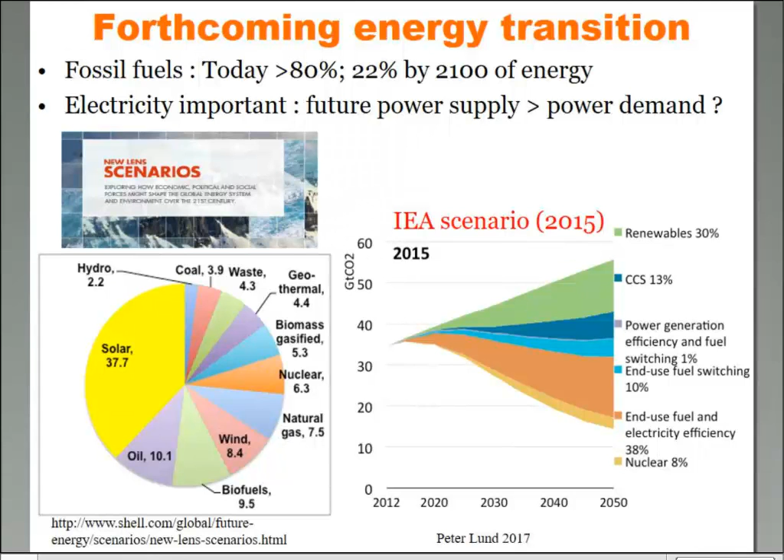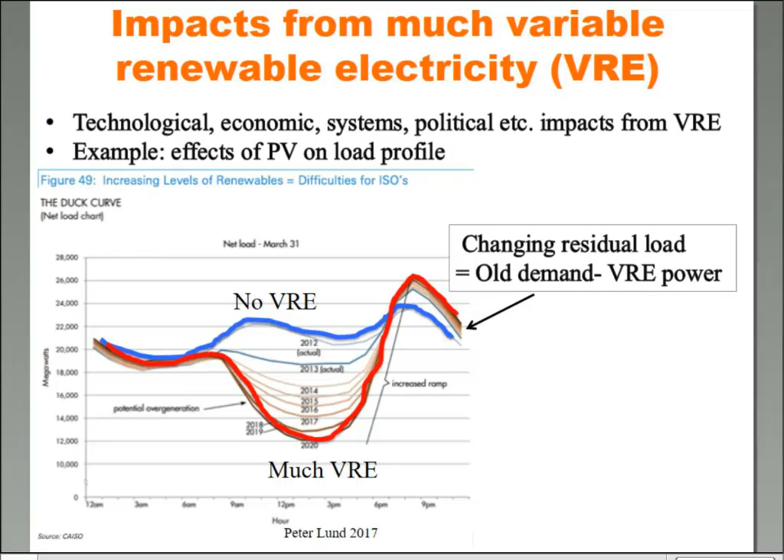So there are some political implications. You may know that in Europe we speak about capacity markets, that there should be some subsidies for traditional power to run in order to match the new profile that we see here. That's why the question of flexibility is very important, in the sense that it really extends from technologies to economics, to policy making, and so understanding what we can do with flexibility has very many-sided implications.

But let's briefly look at the relation of energy efficiency and renewables. In the big macro scenarios that we saw, the Shell scenario or the IEA, they seem to be separate entities, but as we move closer to the real energy grid, to cities, to buildings, you understand that renewables and energy efficiency are much more linked together. Most of the energy, or all of the energy, is consumed on the end-use side, and that's where we see the tighter relation of renewables and energy efficiency.

I think this would be important in particular in the case of urban areas, like cities, where about 2/3 of all energy is consumed now. In the future even more so, because of urbanization. By 2040, 80% of all energy will be used in the built environment and in the urban environment.

Now, the benefits of energy efficiency, in particular in the urban context, for large-scale renewable electricity schemes are quite evident. First of all, if we use less energy, the less energy supply we will need. So that means that we would need less renewable energy.

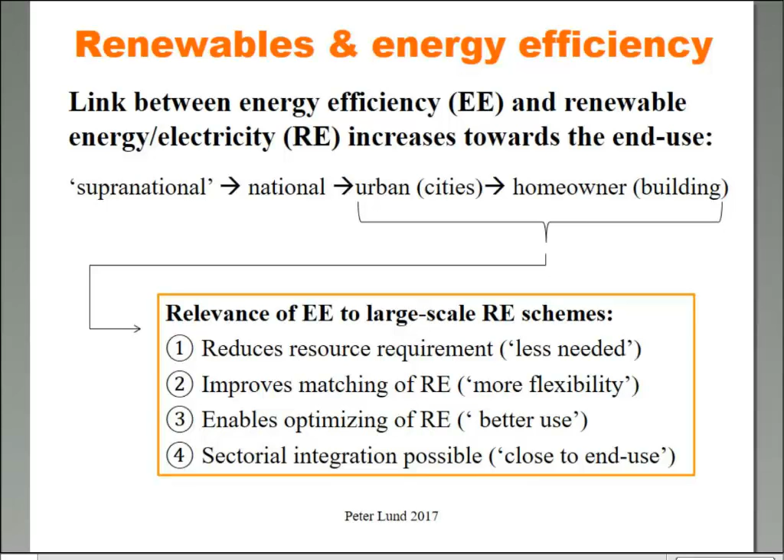And finally, of course, when we are close to the end use and speak about energy efficiency, that would also help with the sectorial integration, so integrating electricity over the different sectors in order to improve flexibility. So that's clear benefits from energy efficiency.

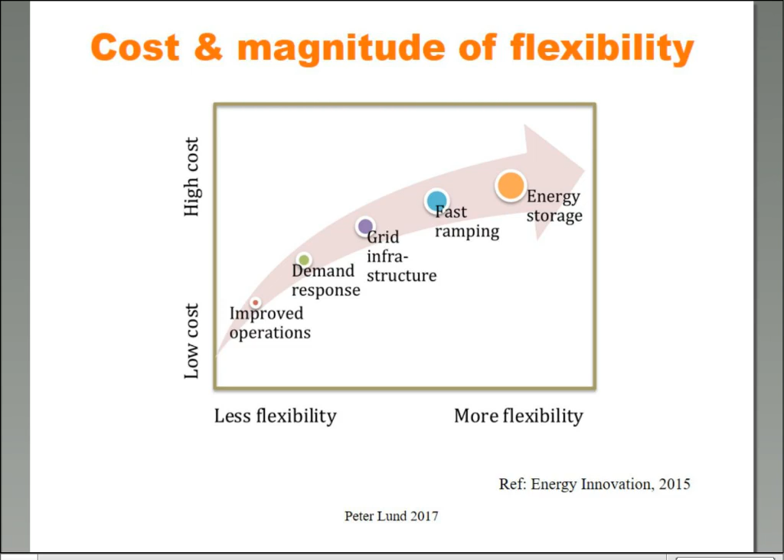So the advanced conversion, or call it also power to X, X describing power to something. X could be heat, cold, mobility, gas, hydrogen, you name it. So that's where in particular the electricity would flow to the different final energy forms, to the different demand sectors. So this kind of conversion of electricity enables us to match the supply and the demand side better. So the electricity would not just go to the electric demand, but could also meet the other demands of final energy in the end use.

And in this way, we would be able to increase the flexibility of the power system, and that leads again to much better integration of renewable electricity in large scale.

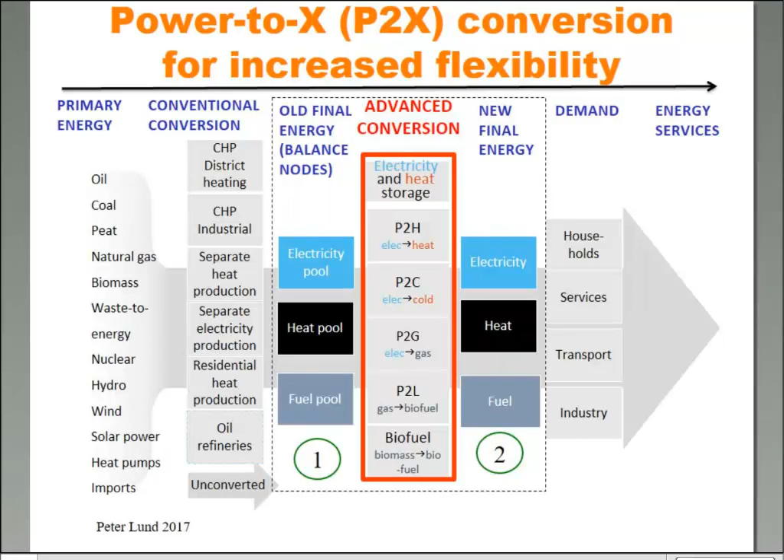The key idea with power to X, this kind of power to something measures, is actually curtailment, cutting of renewable electricity oversupply. And by doing this kind of curtailment, what we actually do is we increase the supply side flexibility. The power to X would make the renewable supply side more flexible. So basically, curtailment would be kind of shaving the supply in the same way as demand side shaves demand. So this is a quite simple approach. In terms of cost, it would be, I would say, comparable to DSM on the demand side.

The curtailed power can be used further, and again, referring to the previous slide, you could use it for heating, transport, or you may just leave it there. So the simplest way is just to curtail and then do nothing, but again, if you curtail much, that kind of extra supply of electricity would be worthwhile to use in other sectors.

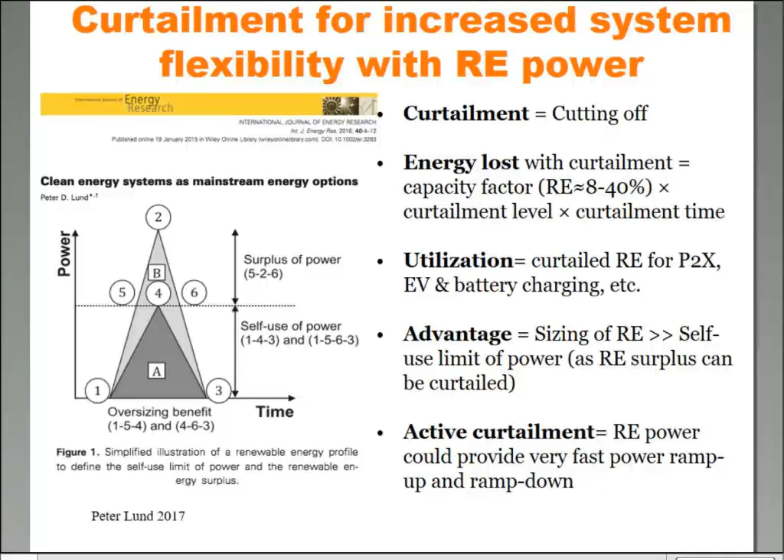So it means that the very sporadic solar and wind would have anyway some reserve power features which could be quite beneficial. Now, if you just curtail very little, the energy loss is not that much. So maybe you don't care about the curtailed power. But if you start to curtail more, then it's of course a question of what to do with the surplus power that we have.

Now, in my presentation, I try to keep the renewable electricity within the city or within the house, so we try to avoid it flowing beyond the boundaries. Of course, if you have a very good grid, you could sell the electricity to neighboring cities or to the electricity market. Now let's try to keep the surplus within our frame.

If doing nothing is the easiest way, the second easiest way to handle the curtailed power would be to make thermal energy out of electricity. So making heat or chilled water. That's what we typically need very much of in the cities and in our buildings. Or you could even store that heat or chilled water for later use.

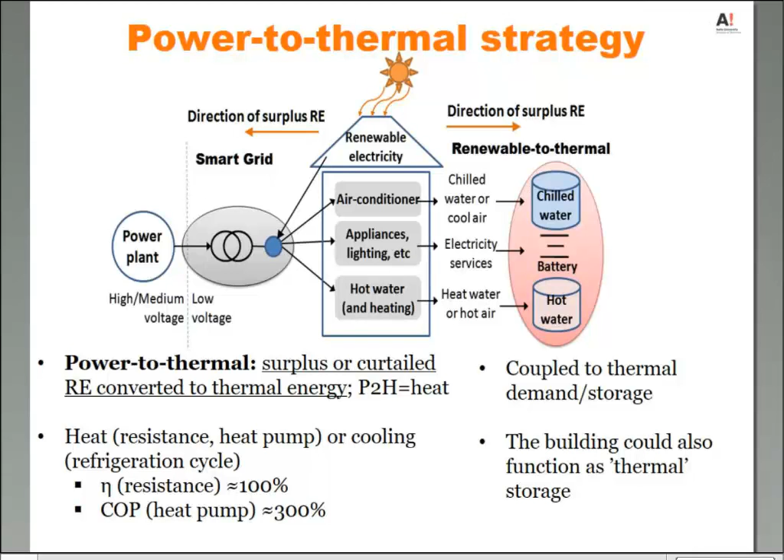In case of power to heat, where we use electricity for heating, the easiest way is just to use electric resistance heat. That's very, very cheap. Now, adding a heat pump, you could even boost the heat production. From 1 unit of electricity, you get 3 units of heat. So in that sense, you could use the overflow of electricity to supply larger amounts of thermal energy on the building side.

Let's take a closer look at the power to heat scheme. As I'm coming from a cold climate, we need a lot of heating. But for those colleagues from the southern climates, I would say the same analogy here would work also for cooling.

Now the rationale for the power to heat, which is more relevant for, let's say, colder climates like Europe and US, Northern Europe: it's important to recognize that most of the final energy that we need in cities would be thermal energy, or in this case, heat. For instance, in Helsinki, my hometown, 2/3, over 60% of the final energy is actually heat.

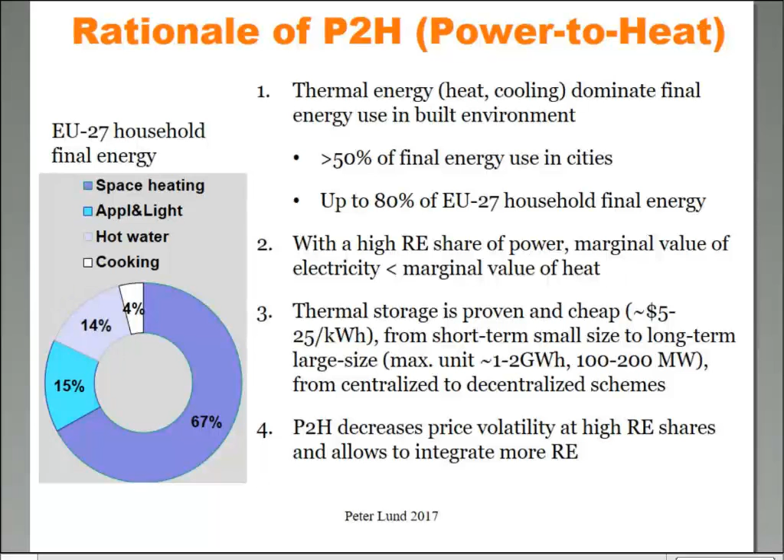Let me now show a few examples of simulation results to demonstrate benefits of large-scale renewable electricity schemes, and also oversizing renewable electricity beyond the self-use limit that very often will be set as a limit. And I would apply here curtailment, and I would also utilize different flexibility measures, in particular the power to heat schemes, but also DSM to some degree. And we use Helsinki here as an example.

We use very much district heating and combined heat and power, but most of the combined heat and power is based on coal and natural gas. So definitely there is a major interest to try to reduce the CO2 emissions and also, in that sense, look at different electricity and renewable electricity options.

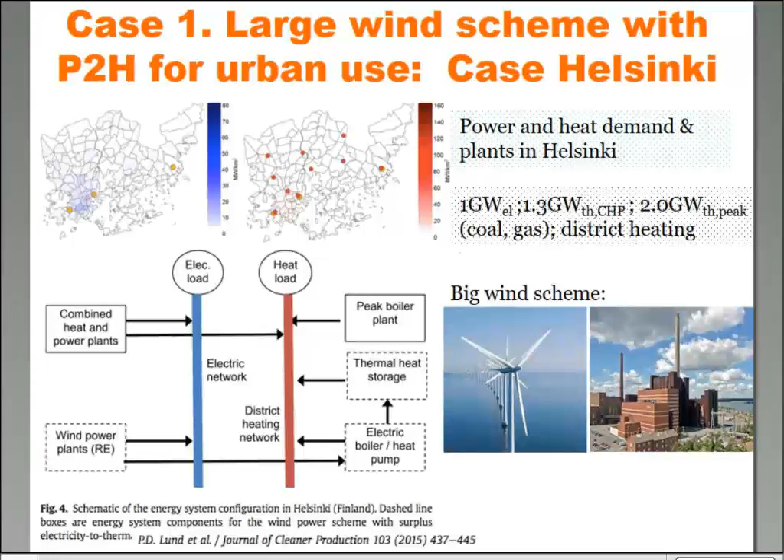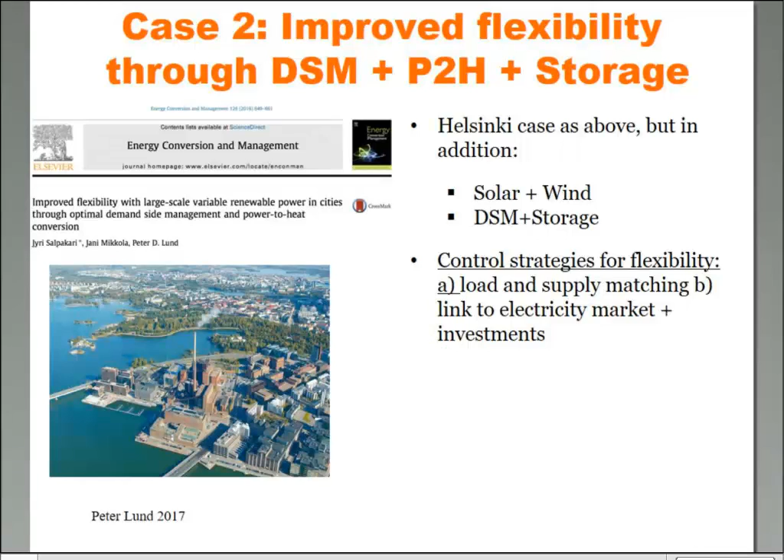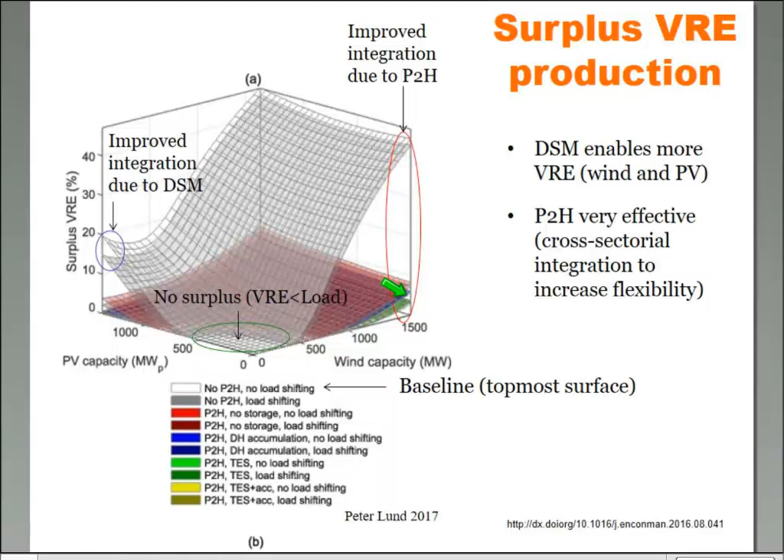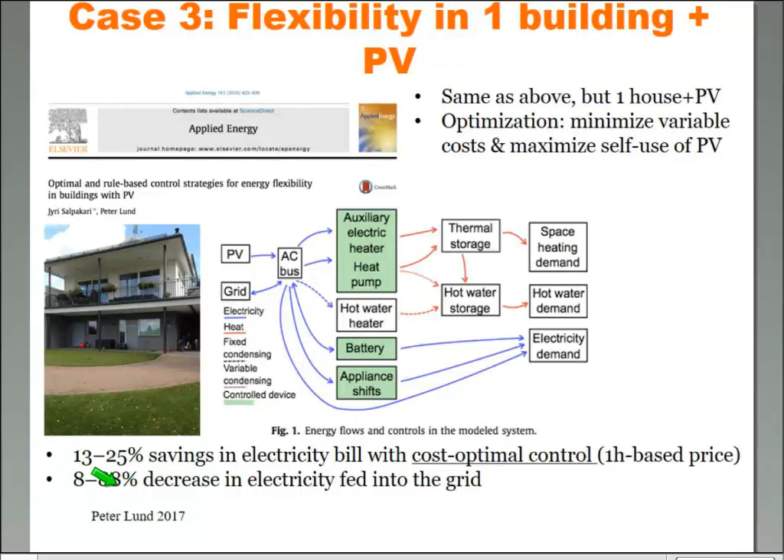And the main results here, again, are that when linking the flexibility measures to the spot price of electricity, so we do a cost optimization against the price of electricity, we could reach about 25% savings in the yearly electricity bill with these kinds of schemes, which is quite a major achievement. Also, most of the electricity in a single house could actually be kept in the building. Compared to just a PV system connected to the grid without any flexibility, we could decrease the feeding of electricity into the grid by almost 90%. So most of the electricity would definitely remain on site.

Now, ladies and gentlemen, let me move to my final part. That was the technical part, and the final part is really on market take-up, on which I would like to make a few remarks. One of the reasons is that, of course, flexibility technologies are new technologies, and we need to think about their market introduction as well. There are factors that affect the diffusion or penetration of innovations, for instance the communication channels linked to decision making, but also the social system, the social context in which decisions are made.

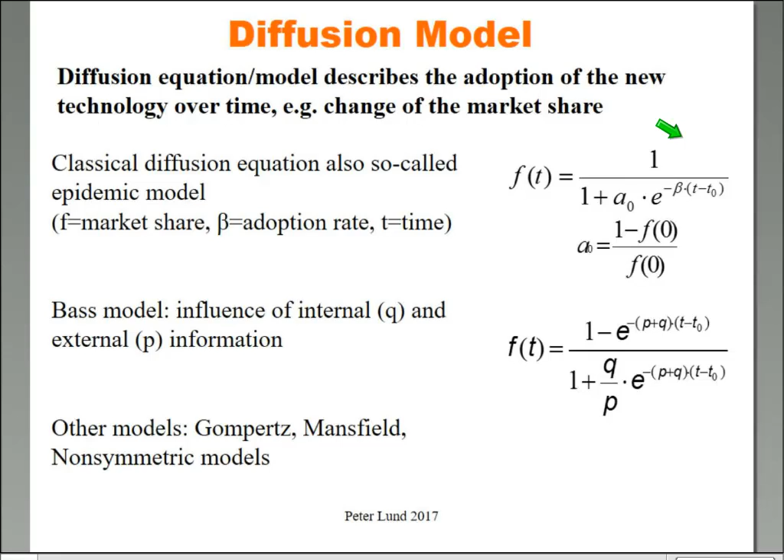In this case, all the factors which affect the adoption of technology are lumped, embedded in this parameter beta. And you could envision that, for instance, financial support or price will affect this beta, and changing behavior would improve the adoption rate itself. So much of the social system and decision making is really linked to this single parameter.

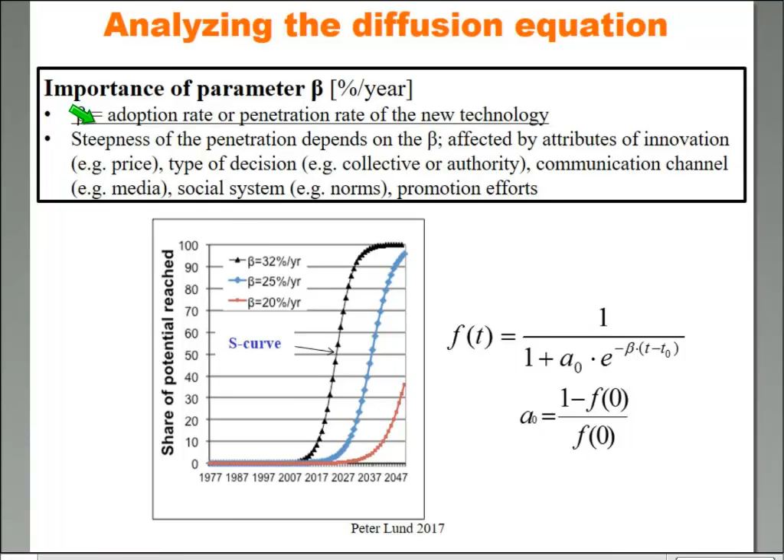That was one kind of observation, comparing technologies on the corporate side or consumer side. So on the consumer side, end-use side, we would see much quicker take-up of the technology.